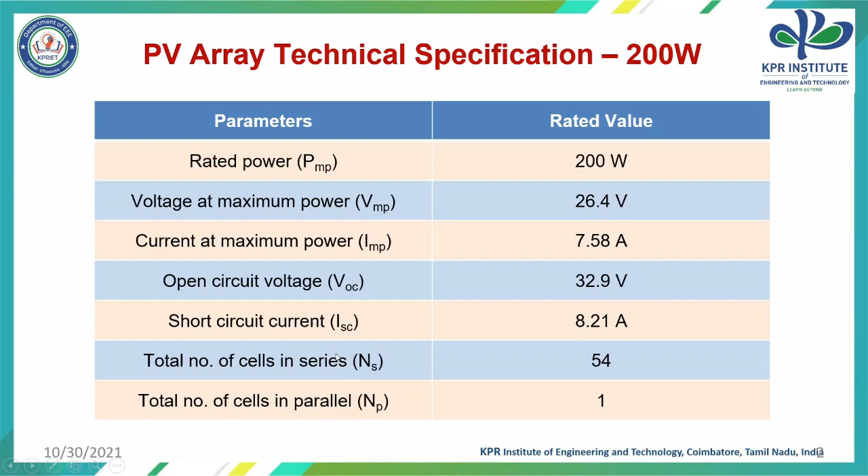So we have chosen the open circuit voltage value of 32.9 volt and similarly short circuit current value as 8.21 ampere. Here the total number of cells connected in series is 54 and the total number of cells connected in parallel is 1. So here we are choosing series configuration of 200 watts PV array.

So when we connect two 200 watt solar panels in series, the voltages are added, the current remains the same and power is the product of voltage and current. So this is the theoretical calculation of series configuration of 200 watts PV array. So here the total voltage is V1 plus V2 since the two voltages are added here.

So V1 we have chosen 26.4 volt and we are adding 26.4 plus 26.4, we get the value 52.8 volt. And the current remains the same in series configuration of 200 watts PV panel. So IT, that is total current, is equal to 7.58 ampere.

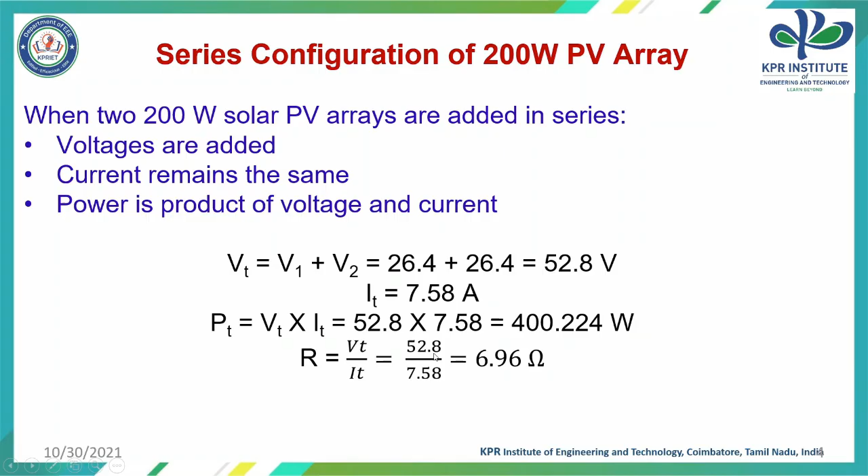The total power is the product of voltage and current. So voltage is 52.8 into current 7.58. When we multiply, we get the value of 400.224 watts. And as per Ohm's law, R is equal to V by I. So V is Vt here and I is It here. So Vt, that is 52.8, It 7.58. So we are dividing, so we get the resistance.

So just open up MATLAB R2021. I have the version 2021B. So just click Simulink. You'll get the Simulink window and you create a blank model. In that, click library browser, so we have to get the components. So type PV array and just enter. You'll get the PV array. So just pick and place over here. Or you can right click on it, click add block to model untitled. So this well suits.

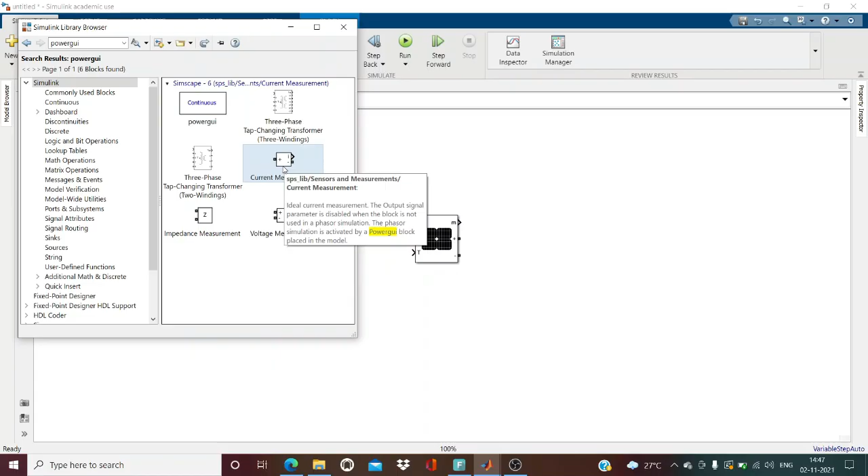Then the second component is power GUI block. So type power GUI and click enter. You will get the power GUI block. So just drag it over here. Next we are in need of current measurement and voltage measurement, in order to measure the current and voltage parameters. So just right click on this, add block to untitled. Similarly voltage measurement, right click on this, click add block to model untitled. So you'll get this here.

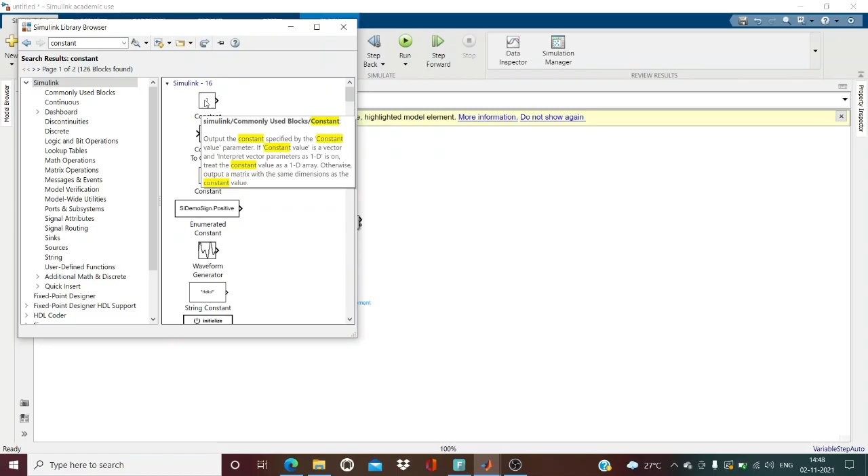Next we are in need of constant block. So go to library browser and just type constant. You'll get the constant block. So just pick and place over here. You need two constant blocks. So just right click on this and click copy, then paste over here. We have to give 1000 here. So click apply and then click OK.

Again we have to give the temperature as input. So double click on this constant block and type the constant value as 25 degrees Celsius. So just type 25 here, click apply and then OK.

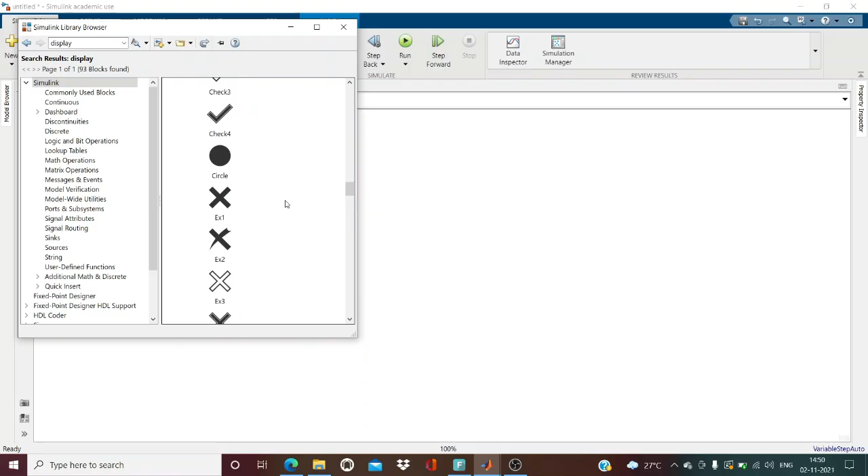Then again go to the library browser. We are in need of display block. So just type display here, click enter. You'll get the display block. So display block is placed in untitled model. So here is your display. Just drag it over here. You are in need of 3 displays, so copy and paste over here.

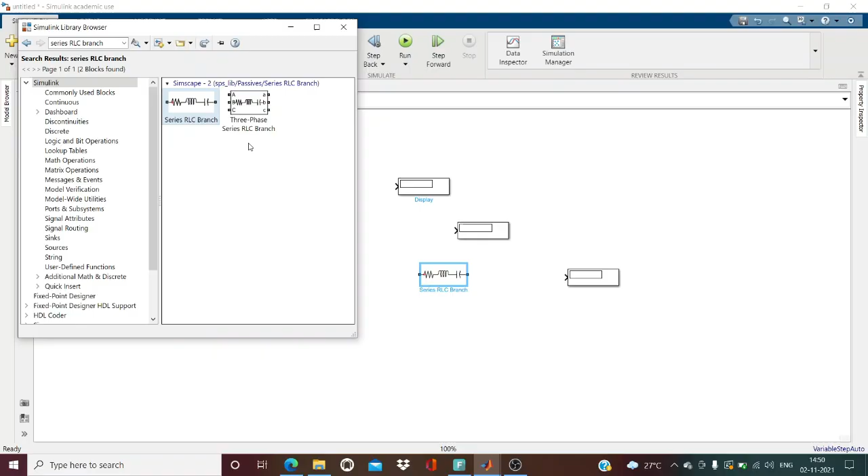Then go to the library browser. You are in need of series RLC branch. So type series RLC branch and click enter. You'll get the series RLC branch. Add block to untitled model. So double click on the series RLC branch. Change this branch type to R. Click apply and then OK.

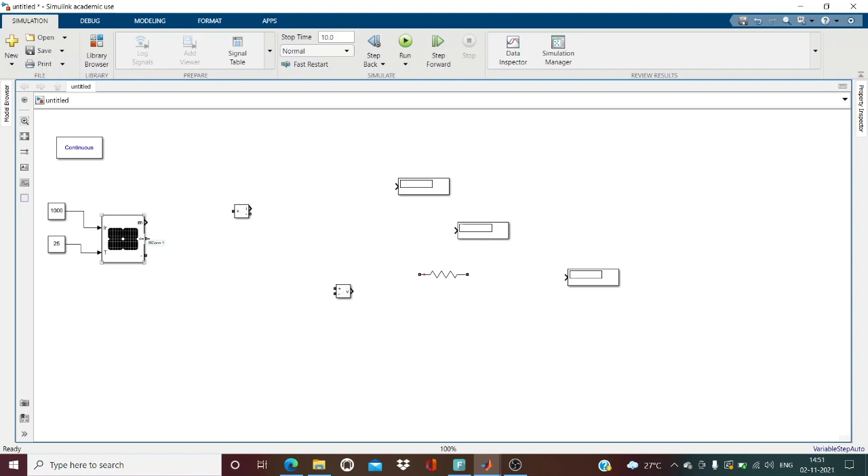So now we are in need of connections. This 1000 is connected to irradiance. This 25 degrees Celsius is connected to temperature. Then plus terminal of the solar PV is connected to current measurement block. Then this minus is connected to this R. So right click on the series RLC, click format, then rotate clockwise.

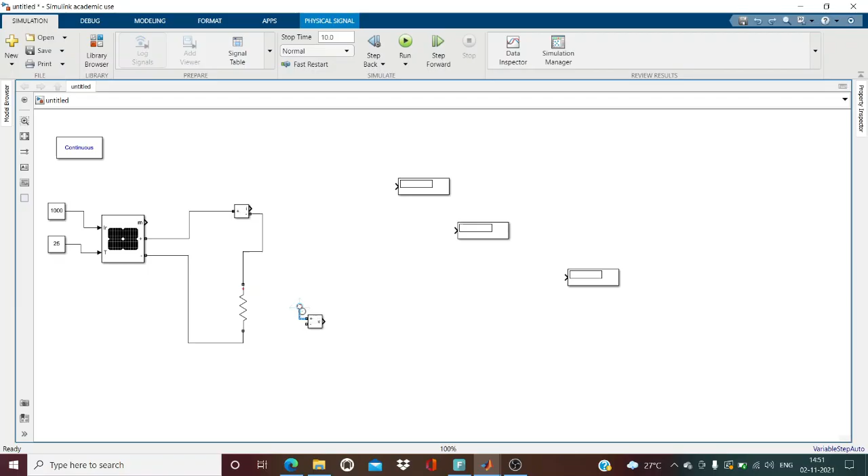Then minus is connected to one terminal of resistor. This solar PV minus is connected to other terminal of resistor. Always voltage measurement is connected across the block, across the resistor. And minus is connected to this terminal. Then we are in need of product. So just type product and press enter. We can place it over here.

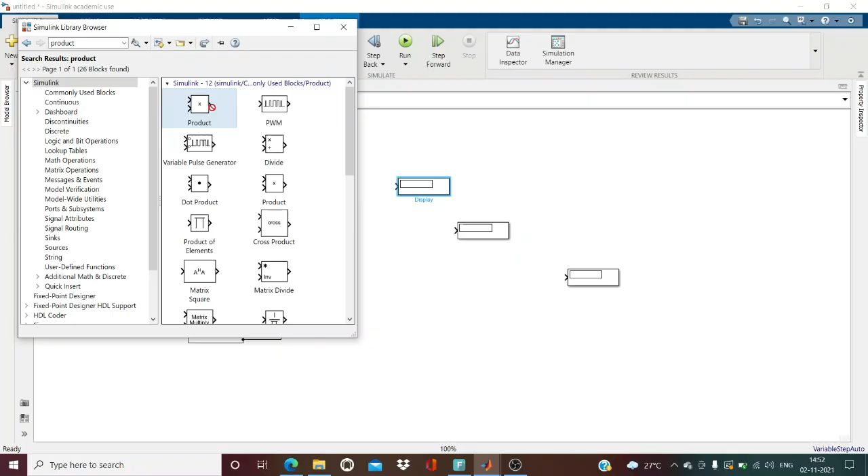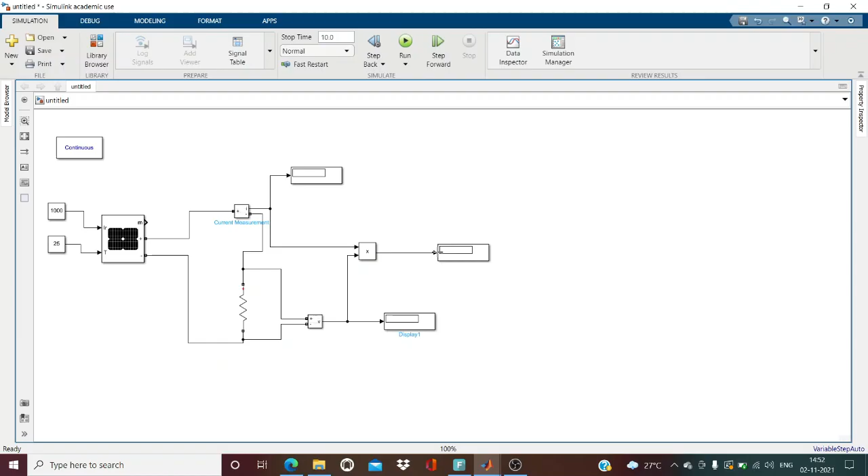So this is to measure current value, this display is for voltage measurement, and this display is to measure voltage as well as current, that is the product of V and I, which is power. So the connections are over.

So just double click on this PV array. We have to give the values. Here we have chosen parallel strings as 1, and series: 2 solar panels are connected in series, so press 2. Here cells per module is 54 as per the technical details of PV array, and open circuit voltage is 32.9. So give the value of 32.9 volt and short circuit current of 8.21 ampere. So just type the short circuit current as 8.21 amps.

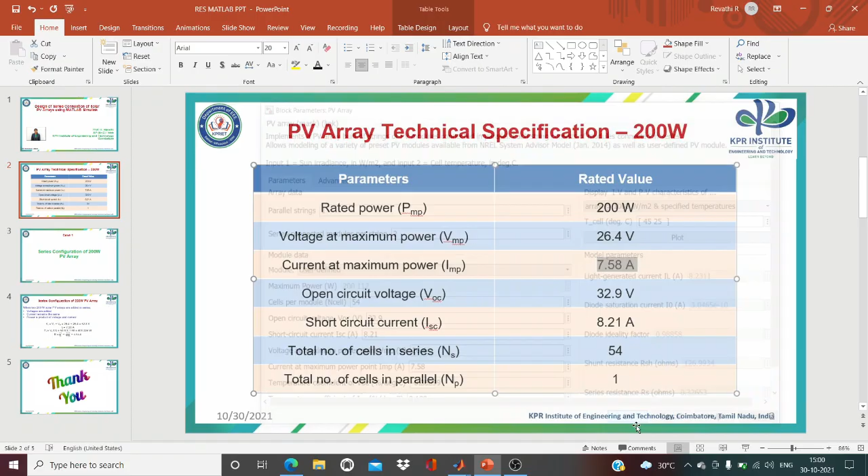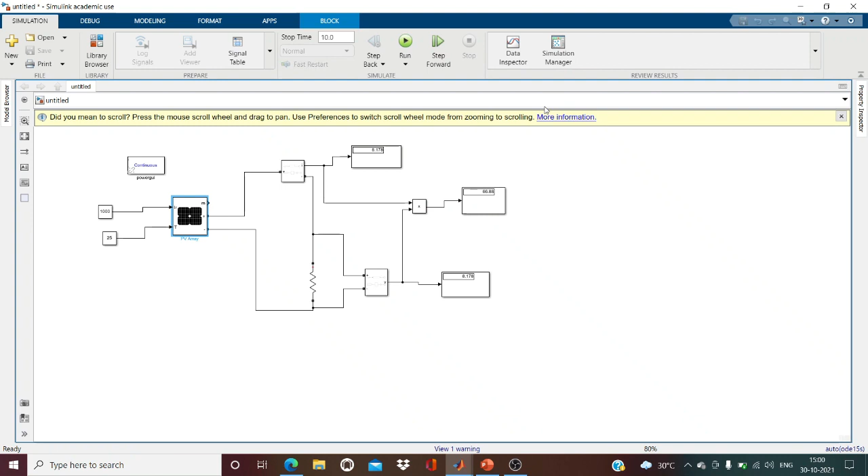So the voltage at the maximum power point is 26.4 volt. So just give the value 26.4 volt. Then current at maximum power point is 7.58 ampere. So just type 7.58 ampere. Then click apply and then press OK. So now simulate this and click run.

So here we have run the simulation and we get the value of current as 7.583 ampere and the value of voltage as 52.78 volt, and the product of voltage and current is nothing but power. So power we have obtained as 400.2 watts. So now compare this with the theoretical value of series configuration.

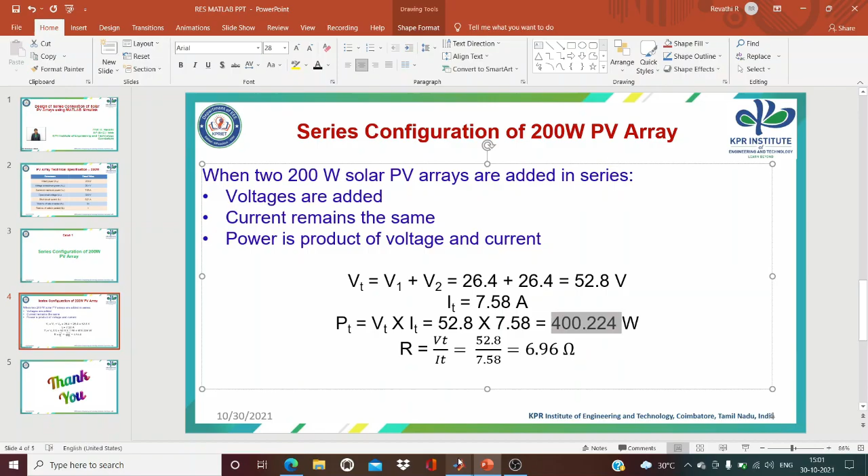So we get the total voltage as 52.8 volt. So here 52.8 volt, then current as 7.58 ampere. Here we get the current as 7.583 ampere, and power as 400.224 watts, so power as 400.22 watts. Okay, so this we have simulated in MATLAB software.